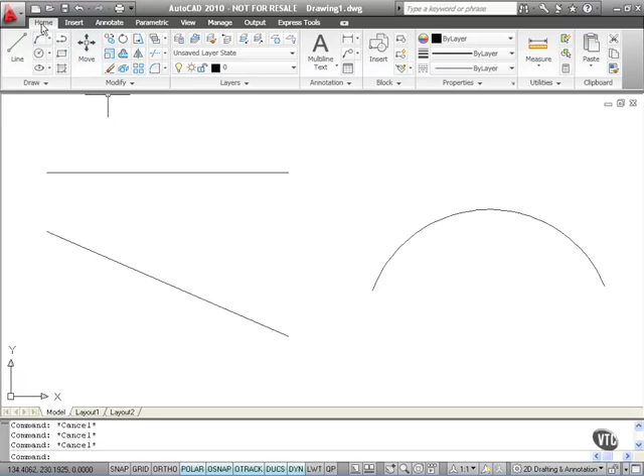You'll notice that we have the Home tab here at the top of the screen, and we also have Insert, which is a new tab. As you can see, we can insert blocks, attributes, references, we can import, we can put data in, we can link and embed, and we've also got content here where we can use Autodesk Seek, which searches the Autodesk Seek website for content relevant to the keywords entered in this box. We will cover that in more detail throughout the QuickStart course.

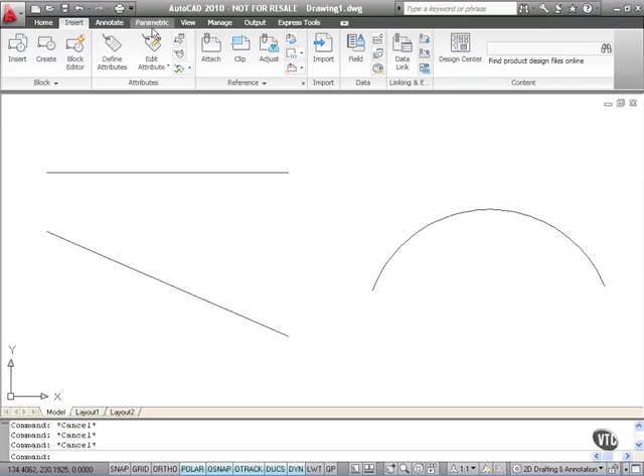We also have a new tab here, the Parametric tab. These are new features for AutoCAD 2010 only, and what they allow you to do is apply geometric and dimensional constraints to objects in AutoCAD, allowing you to parametric model within AutoCAD.

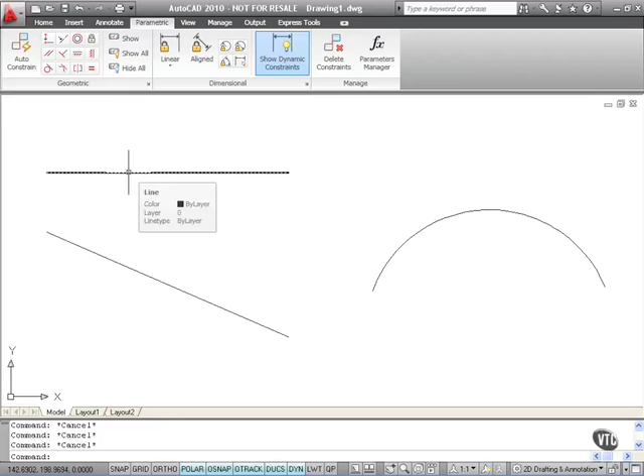For example, I have a line here that is horizontal. I also have a line here that is at an angle. I want the angled line to always remain parallel to the horizontal line. So if I use the parallel constraint, I click on it, I select the horizontal line first, and then I select the left hand end of the angled line because I want it to go from this point. As you can see, that line now will always be parallel to that line. That little blue symbol that appears indicates that they are constrained.

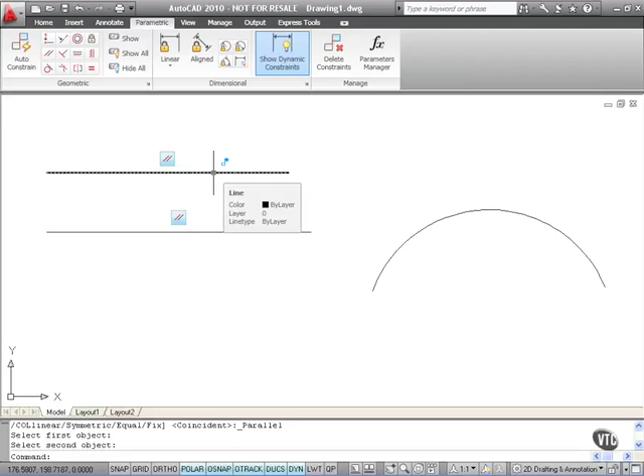We also have a new Manage tab, and this allows us to manage our AutoCAD drawings. We have the Action Recorder, we have Customization, applications that can be run within AutoCAD. Notice as well now we have CAD standards. These have sort of taken a back seat over the last few years, and now we have a CAD standards panel on the ribbon so that we can run DWS files against DWG files.

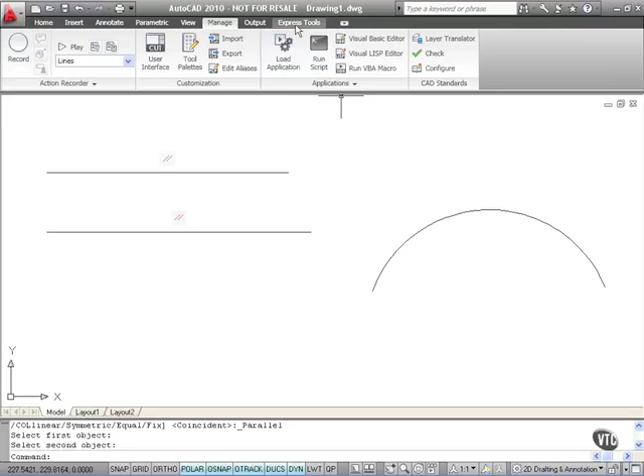Another new tab is the Express Tools tab, and this allows you to work with the Express tools in AutoCAD. These have been around for quite some time, quite a few years, and a lot of these Express tools have been written by individuals or organizations that use AutoCAD.

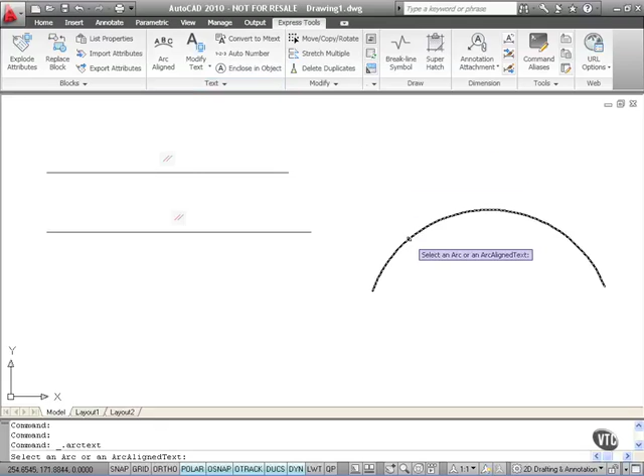One of my favorites here is the Arc Aligned Text. If I click here and come into the drawing, it prompts me to select an arc or some arc aligned text. I'm going to select my arc, and as soon as I click there, it prompts me now to put the arc aligned text in the dialog box.

I can select a font or a text style. I'm going to select the Verdana font, and the text that I'm going to put in there is "This is arc aligned text." So I've put some text into the dialog box. This is a metric drawing, so I'm going to make the text height 6 mm, and the text is going to be offset from the arc by 3 mm.

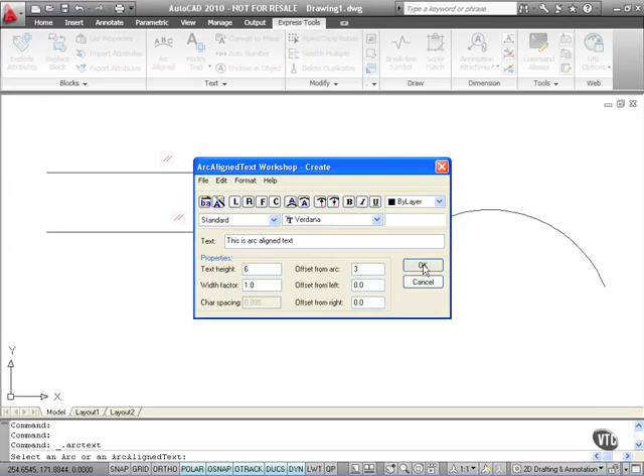When I click OK, it takes a few seconds to think about it, and then it will place that text around the arc for me. As you can see, there's the arc aligned text. It does take a few seconds to think about that sometimes, because it's actually figuring out how to place those letters aligned to that arc.

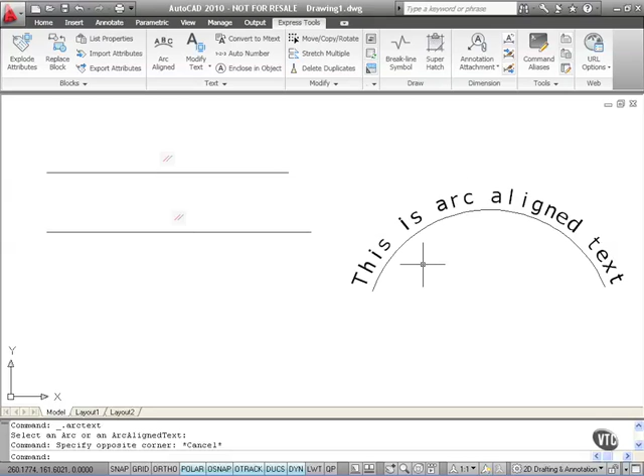So as you can see, lots of new features, lots of new smaller features available in AutoCAD 2010 to allow you to be more productive and more effective. We're going to cover all of the new features in AutoCAD 2010 throughout this QuickStart course.